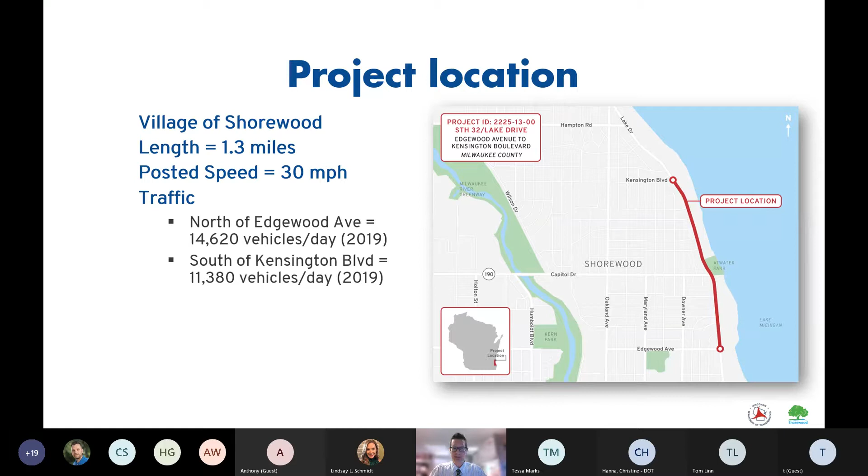So the project is fully located within the village of Shorewood. The limits are Edgewood Avenue on the south end of the project and Kensington Boulevard on the north end of the project. Project length is 1.3 miles, and the posted speed is 30 miles an hour. Traffic just north of Edgewood Avenue is about 14,600 vehicles a day, and south of Kensington, it's just over 11,000 vehicles a day.

The purpose and need of the project is to address the failing pavement condition. Original pavement was installed in 1952, and we want to upgrade existing municipal underground facilities. At this stage in the project, we also need to consider bike and pedestrian accommodations.

So the proposed improvements include pavement construction. This is removing the existing pavement and gravel base below it, replacing the curb and gutter, improving curb ramps at intersections. This is where sidewalks meet the curb to make sure that it's ADA compliant, and again, replace combined sewer and water main in the village of Shorewood.

The base construction cost estimate for replacing the existing project in kind, pulling out the pavement and doing the work stated above, is about $7 million to $7.7 million. Of this, the driving lanes for the project would be paid for with federal and state funding, 80% federal funds, 20% state funds. Although the parking lanes would be funded 80% by federal funds, 5% by state funds, and 15% by Village of Shorewood funds.

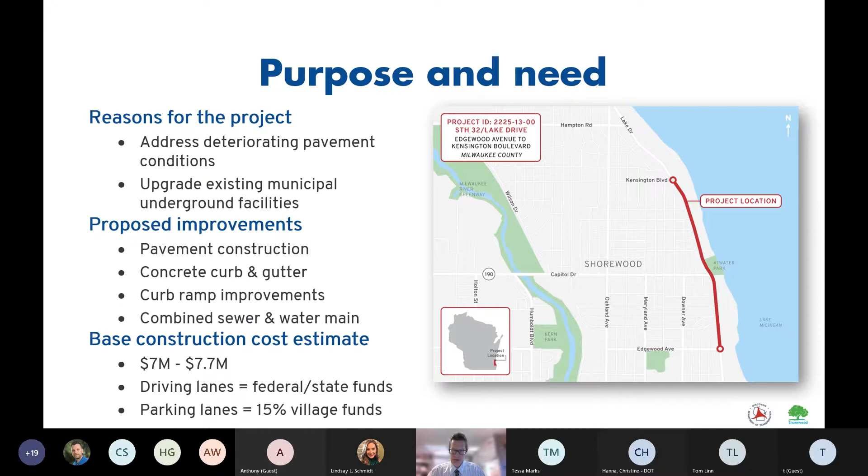So there is one alternative that affects the village cost share, and I'll point that out when we start discussing the options in more detail.

Before we look at the proposed alternatives, this corridor is State Highway 32. So there's standards that apply for bicycle and pedestrian accommodations, as well as the driving lane and parking lane widths. We'll be following the Wisconsin Department of Transportation's Facilities Development Manual, which has both desirable and minimum standards, and our alternatives were developed for both. We're also required to show options for bike accommodations.

Some of these alternatives affect on-street parking, others affect existing terrace trees. These are trees located in the green space between the back of curb and the front of the sidewalk. Although there's a risk to these trees with any of the construction alternatives, the Village of Shorewood arborist believes that widening the roadway would have a negative impact on these existing trees, as their roots likely extend to the back of curb. On other village projects where curbs have been expanded or moved out, the arborist has seen that some trees decline quickly, while others decline slowly over 5 to 10 years.

As a designer, we may deviate from the desirable standards with strong public input, as well as considerations of impacts to the trees and parking, as well as the parkland. We have Atwater Park in the corridor and historic districts. There's 2 residential historic districts in the corridor. So in summary, we need to balance all this with the federal and state standards, as well as with the needs of the local community and the residents. So we're here to get your input today.

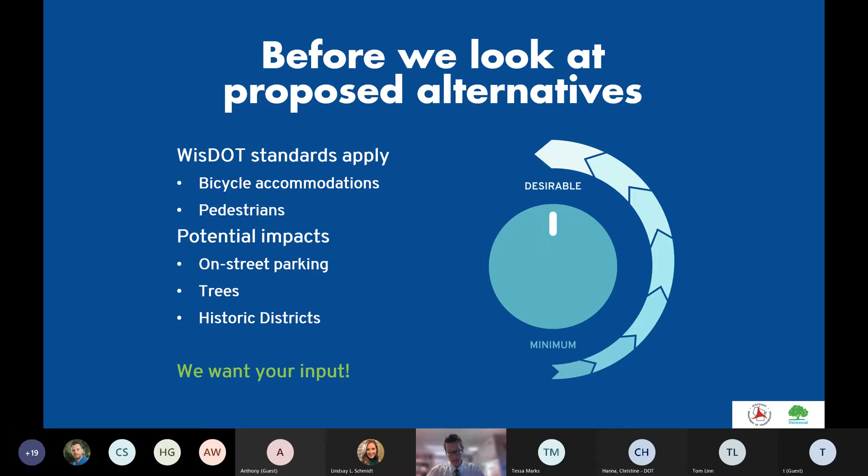The next slide shows an overview of the project corridor. We see the project corridor falling into 3 segments. There's the south segment from Edgewood Avenue up to Shorewood Boulevard. There's the Capitol Drive intersection segment, which goes from Shorewood Boulevard to approximately Jarvis Street. And then there's the north segment, which goes from Jarvis to about Kensington Boulevard.

Looking at this existing configuration, this is for the north and south segments. If we dive into this typical section, it measures 44 feet from face of curb to face of curb. There's one 11-foot travel lane in the northbound direction and a second 11-foot travel lane in the southbound direction. On the outside, we have 11 feet, and this is shared for bike use and parking. So this is the existing configuration.

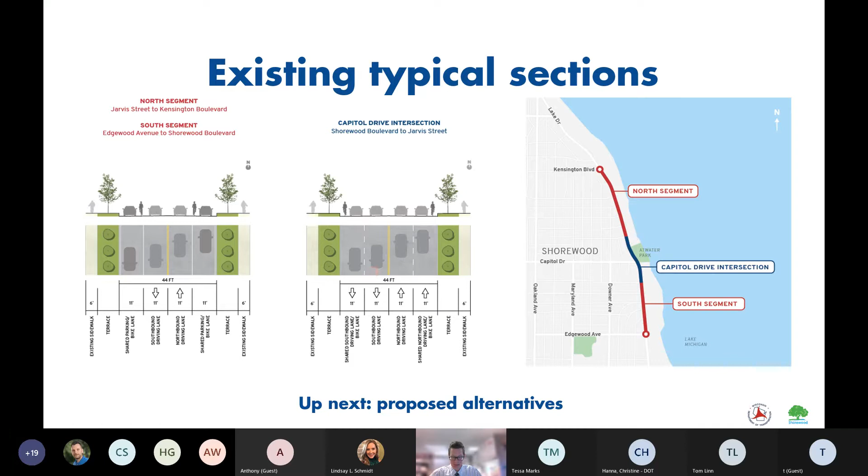Here is our terrace area that we talked about with the trees and the existing sidewalk on both sides. At the Capitol Drive intersection segment, that's Shorewood Boulevard to south of Jarvis Street, today there's 4 lanes. There's 2 lanes going northbound that measure 11 feet, and there's 2 lanes that go southbound that measure 11 feet. So proposed alternatives were developed for these segments, and that's what you'll see here coming up.

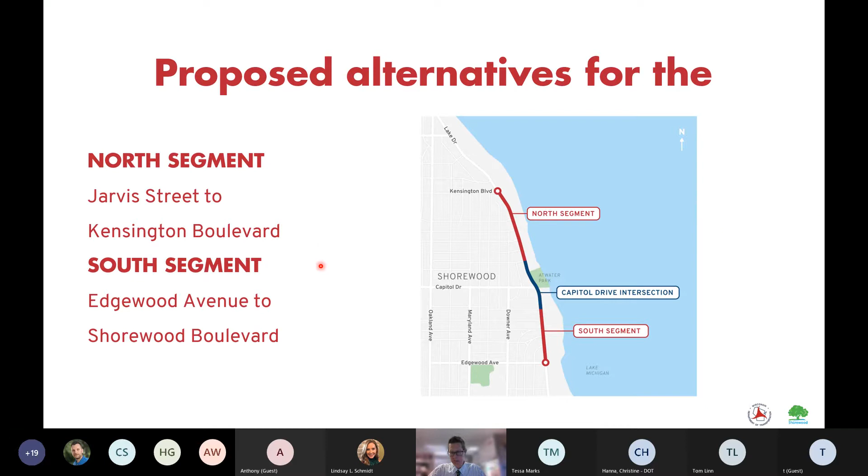We'll begin with the north and south segments. The north segment goes from about Jarvis Street to Kensington Boulevard, and the south segment goes from Edgewood Avenue to Shorewood Boulevard. We'll start with the 5-foot bike lane alternative. This alternative measures 44 feet from face of curb to face of curb. There's one 11-foot driving lane in the northbound direction and one 11-foot driving lane in the southbound direction.

On the outside of the roadway, there is a 2-foot gutter and a 5-foot dedicated bike lane in both the southbound and northbound directions. On the outside of the roadway, there's room for one 8-foot parking lane. The alternative here on the screen shows it on the east side of the roadway, because Atwater Park is located on the east side of Lake Drive.

This may reduce the amount of crossing that might potentially happen at a mid-block location with parking on the west side of the road. With parking restrictions like there are today in the PM peak hour, it allows for situations when northbound vehicles are turning left onto the side roads, providing space for vehicles traveling through to bypass them with the parking restrictions on the outside. That said, the parking could be placed on the west side of the road instead of the east side, which would just flip this alternative 180 degrees.

Digging into the specifics of this alternative, again this is the 5-foot bike lane in the north and south segments. The road width is 44 feet, matching existing conditions. There's no widening, however there's only parking on one side of the roadway. There are dedicated 5-foot bike lanes, which is considered a desirable bike accommodation per WisDOT, those standards we talked about earlier. This is one of the desirable options. Without widening, there'd be fewer potential tree impacts, and it does fit within that base construction cost estimate that I showed earlier of $7 to $7.7 million.

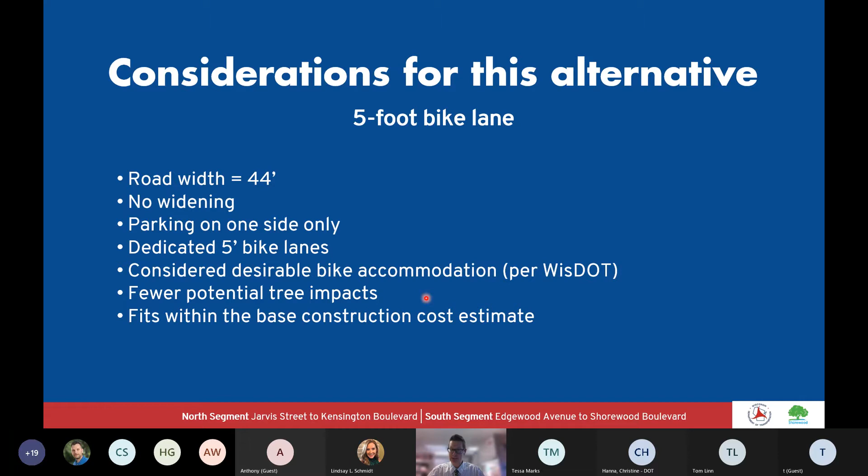So that was the 5-foot bike lane.

Looking at the 12-foot shared parking bike lane, this has one 11-foot driving lane going northbound and one 11-foot driving lane going southbound. However, the outside lanes have been widened 1 foot to provide a shared parking bike lane, so both southbound and northbound bikes would share this parking lane.

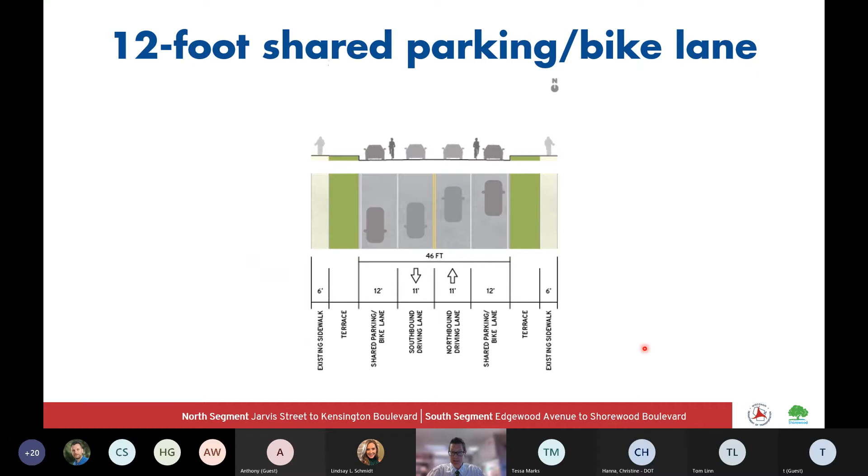Again, this measures 46 feet from face of curb to face of curb. Looking at the specifics of this alternative, with that 46 feet, there is 1 foot of widening on each side of the roadway. However, parking is still provided on the east and west sides, and bikes do share a 12-foot parking lane. This is considered a minimum accommodation for bikes and parking when they're combined together in a constrained environment.

That's when we have parklands such as Atwater Park as well as historic districts. But with that 1 foot of widening, there is a greater potential impact to trees, and it does add $130,000 to $190,000 to the base construction cost estimate that we discussed. And because this widening is in the curb lane, in the parking lane, this would be part of the project that's funded by 15% Village of Shorewood funds. So this alternative would cost the village taxpayers additional money.

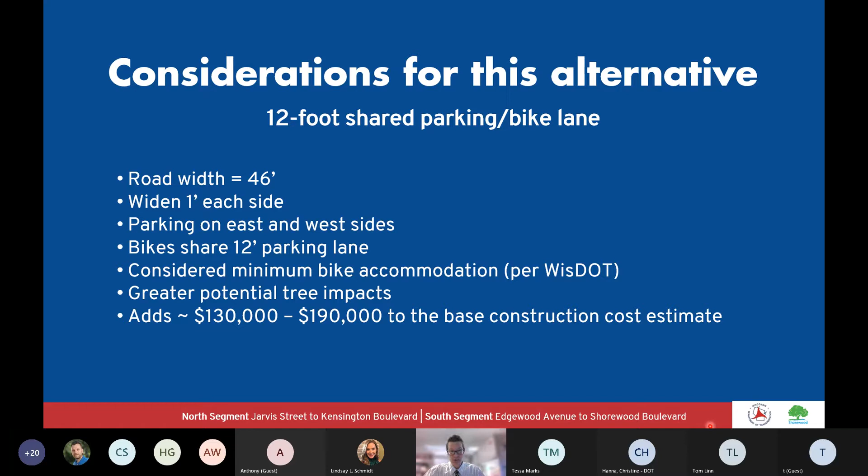So this is the 12-foot shared parking bike lane alternative for the north and south segments.

The final alternative would be the replace in kind alternative. This is removing everything that's there and putting it back in the same exact configuration. This measures 44 feet from face of curb to face of curb, just like existing: one 11-foot northbound lane, one 11-foot southbound lane, and on the outside, 11 feet for parking and bike use.

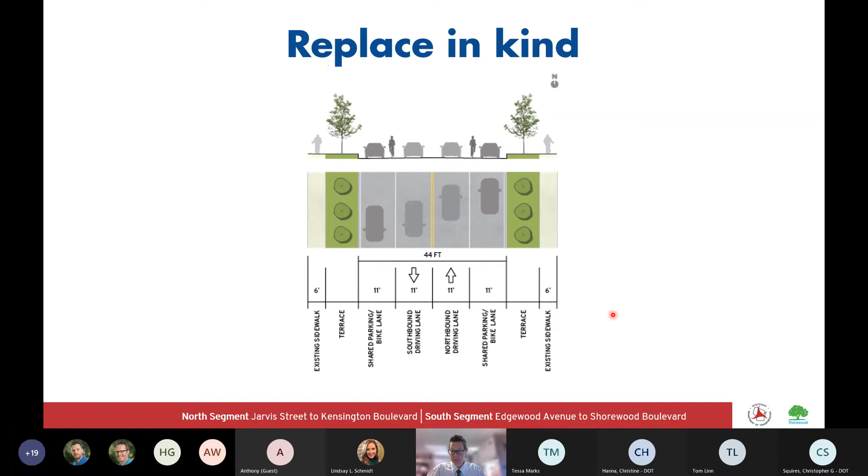Looking at the specifics of the replace in kind alternative for the north and south segments, again, road width is 44 feet. There would be no widening. Parking would be provided on the east and west sides, just like there is today. Bikes do share an 11-foot parking lane. This does not provide a bike accommodation per WISDOT. With no widening, there'd be fewer potential tree impacts, and it does fit within the base construction cost estimate.

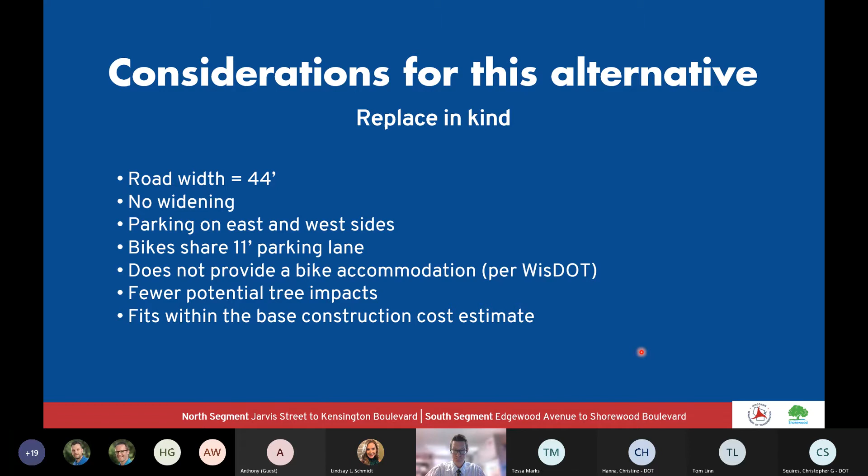At the Capitol Drive intersection, again, this is the area between Shorewood Boulevard and just south of Jarvis Street. In this area, we have 4 alternatives. We'll start with the 5-foot bike lane.

So looking at the 5-foot bike lane at the Capitol Drive intersection, again, the road width is 58 feet. This is about 7 feet of widening on each side of the roadway. The outside driving lanes would be 11 feet wide. This does meet the minimum standards for the amount of traffic and trucks we have in the corridor. There would be dedicated 5-foot bike lanes, considered a desirable bike accommodation per WisDOT.

However, we would have tree impacts, and we would be impacting the traffic signals at the Capitol Drive intersection. So with the signals and added pavement, this would increase the base construction cost estimate by $420,000 to $540,000. Again, this is the 5-foot bike lane at the Capitol Drive intersection.

The next alternative is the 4-foot bike lane. This alternative measures 52 feet from face of curb to face of curb. There, again, are 2 11-foot driving lanes going northbound, 2 11-foot driving lanes going southbound. There's a 4-foot dedicated bike lane southbound as well as northbound.

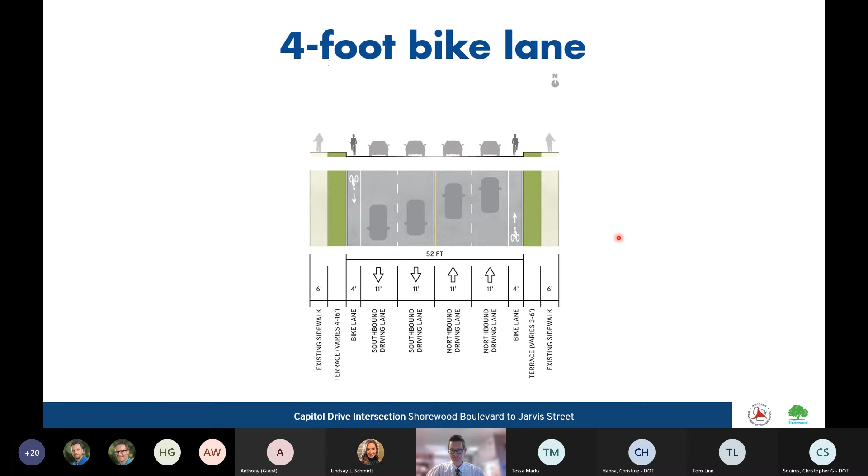Moving on to the specifics, the road width is 52 feet with this alternative. That means there's widening of about 4 feet on each side of the roadway. The width of the outside driving lanes are 11 feet, which meets standards. There would be dedicated 4-foot bike lanes, which is considered a bike accommodation per WISDOT. We'd be impacting the trees and the traffic signals, and it would be adding about $290,000 to $350,000 to the base construction cost estimate.

Moving on to the 12-foot shared driving bike lane at the Capitol Drive intersection. This has one northbound 11-foot driving lane, one 11-foot southbound driving lane, and the outside lanes are shared, 12-foot wide on each side. There's a northbound and southbound lane, but here bikes would be forced to ride with live traffic.

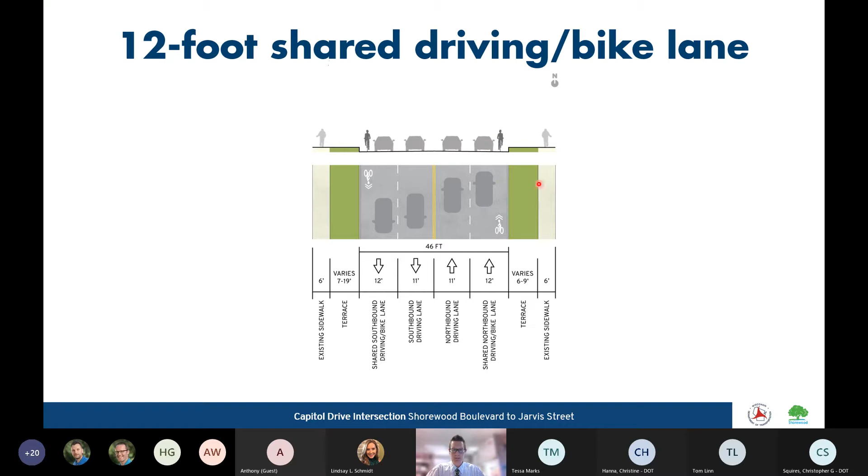So the 12-foot shared driving bike lane alternative at Capitol has a road width of 46 feet, with widening of about 1 foot on each side. We've seen that vehicles tend to drive 1 foot off the face of curb, so with that 1-foot width deducted, the effective width of the outside driving lane is only 11 feet. However, that does meet the WISDOT standards for the amount of traffic and trucks in the corridor.

Bikes would be sharing that 11-foot wide driving lane; however, this does not provide a bike accommodation per WISDOT. With the widening, we'd have greater potential tree impacts. There would be no impacts to traffic signals, but it would add $30,000 to $50,000 to the base construction cost estimate. This would be the 12-foot shared driving bike lane at the Capitol Drive intersection.

Final option here would be the replace-in-kind alternative. Again, this is pulling out what's there and putting it back in the same exact configuration. Here we have one 11-foot driving lane going northbound, one 11-foot driving lane going southbound. The outside lanes in both directions are shared, with 11-foot width for driving and bikes.

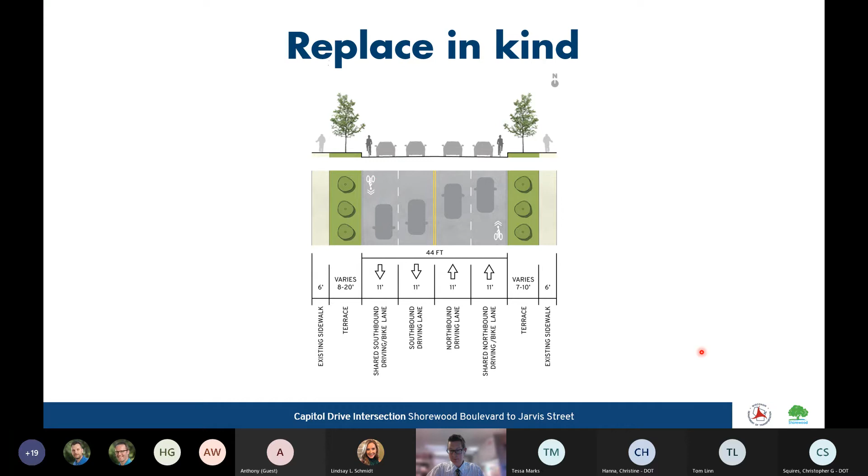This all occurs in a live lane of traffic. Again, this measures 44 feet from face of curb to face of curb, so with that 44 feet there is no widening. However, the effective width of the outside driving lane is only going to be 10 feet in this alternative, which does not meet the WISDOT standard for driving lane width given the amount of traffic and trucks in the corridor. Bikes share the 11-foot driving lane.

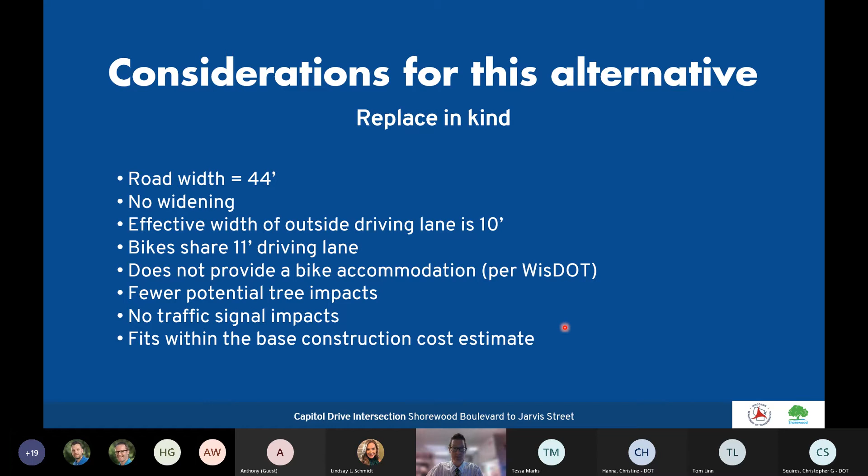This does not provide a bike accommodation per the WISDOT standards. However, there would be fewer potential tree impacts because we're working within that 44-foot footprint, no traffic signal impacts, and it fits within the base construction cost estimate.

Before we finish, I want you to know that we can mix and match the various alternatives. For example, if it's determined that the 5-foot bike lane is appropriate for the south segment, that doesn't mean it's the appropriate alternative for the Capitol Drive intersection or the north segment. So these alternatives can be combined or blended to complete the full project corridor. We'll also be coordinating with the City of Milwaukee on the south end of the project and the Village of Whitefish Bay on the north end to make sure we transition our pavement marking with projects in the neighboring community.

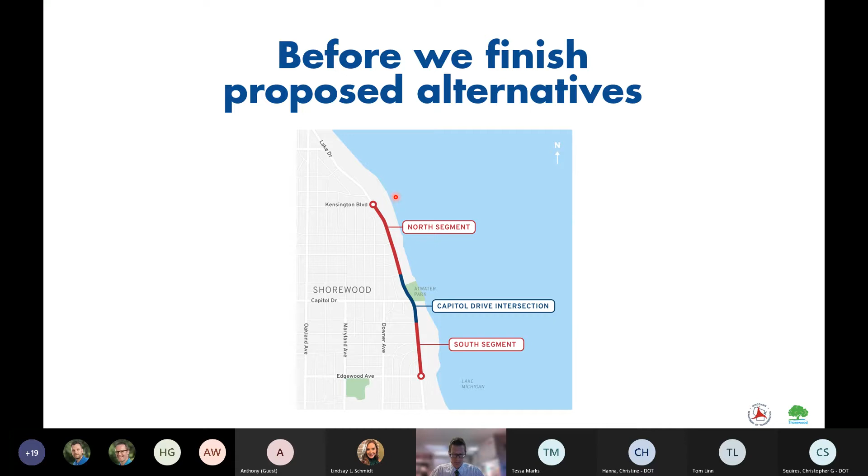Most of the existing sidewalk will remain. However, there will be minor sidewalk replacement, occurring at curb ramps at locations where the sidewalk meets the curb at intersections. We need to make sure the landings and ramps are ADA compliant, so those will be replaced. For the sewer and water work, if there are laterals going to any properties to connect those, there may need to be sidewalk removed.

With the widening options, this is showing the 5-foot bike lane at Capitol. Pushing that curb out may impact sidewalk where it's close, and that may need to be replaced. So in this case, there's potential sidewalk replacement at Atwater Park.

Looking at the sewer and water, about 2,700 lineal feet of combined sewer would be replaced south of Capitol Drive, and 6,600 lineal feet of water main throughout the project limits.

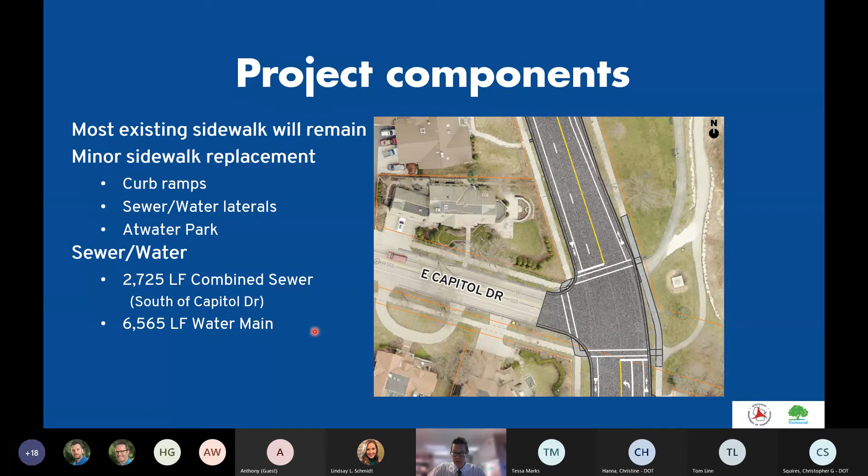In addition, the Village of Shorewood is looking to replace lighting. So any street lighting, whether it's impacted or not in the terrace area, will be replaced with new wiring, conduit, and new poles with LED luminaires to improve efficiency. As far as right-of-way goes, there are no relocations in the corridor.

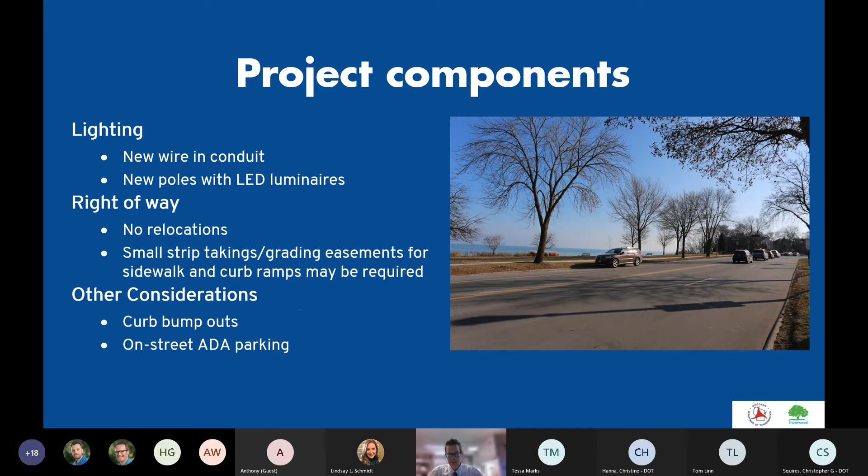However, there could be some small strip takings of land or grading easements required for the sidewalk and curb ramp work discussed previously. Other considerations for the project include curb bump-outs to shorten crossing distances for pedestrians as well as calm traffic, and looking at on-street ADA parking, likely near Atwater Park. These will be components of the project that we'll be looking at as the design progresses.

There are several ways to view the exhibits. Typical sections would be posted at the Village Hall and Library, and printed plan views showing the alternatives would also be at the Village Hall. But the best place to get your information is the project website.

We're going to take recordings of this presentation, both the 5 o'clock and the 6:15 one. They were the same, but we'll have them both on the website, as well as a PDF of this PowerPoint. There will also be exhibits showing the typical sections for the north, south, and Capitol Drive segments, shown with plan view layouts. Residents will be able to zoom in on their property and see the various layouts—think of it as flying across the roadway in a helicopter, looking down, to see the view of these different alternatives near the various parcels.

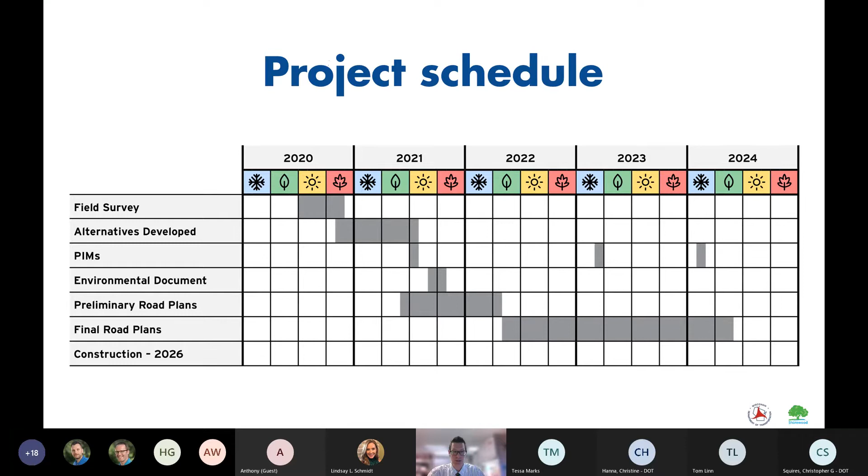Jumping ahead to the project schedule: field survey data was collected by Kapur in late 2020. We're currently developing the alternatives, and as we refine our design, additional public meetings are anticipated. The environmental document, a categorical exclusion checklist or CEC, is planned for late 2021. The 60% plan is due in 2022, final plans are not due until May of 2024, and construction is currently scheduled for 2026.

So, steps to identify a preferred alternative: first, develop a purpose and need for the project—replacing the failing pavement and installing municipal underground facilities. Then we develop alternatives that meet that purpose and need, assess and evaluate them, and gather input—that's where we are right now, looking for input on the alternatives. From there, we'll identify a preferred alternative, working with the Village of Shorewood on that selection, which will ultimately be documented in the categorical exclusion checklist, or CEC.

The steps for selecting the preferred alternative involve strongly considering the need for bike and pedestrian accommodations, looking at impacts—whether it's trees, parking, historic resources, or Atwater Park—costs, and public input.